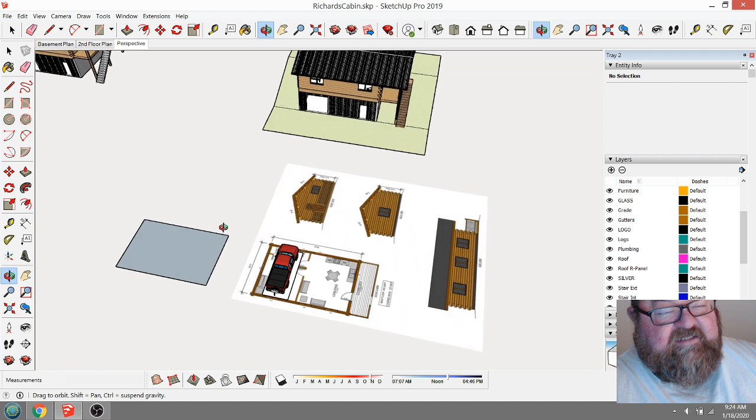But the reason I mention that is because Richard, if you're out there, has talked to several people about this, and I think it's great to get advice from your friends about these kinds of things. But you're doing the right thing, okay? You're talking to a person who's been doing this for 40 years, and I can help you. And I'm going to show you why the little cabin is not for you.

My rule of thumb is that anytime somebody comes to me and they want to build a home, they should never, ever, ever, ever take a plan out of a magazine and call it theirs. First of all, it's kind of tacky. Second, it's just not right. You need to design your home around you and your own requirements.

There are minimums in this business, but those minimums are like code requirements, and people refer to the code as if it's some kind of a Bible. It's not the Bible. The Bible is the Bible. The building code is the building code. It is a minimum. It is not the standard. It's the minimum standard.

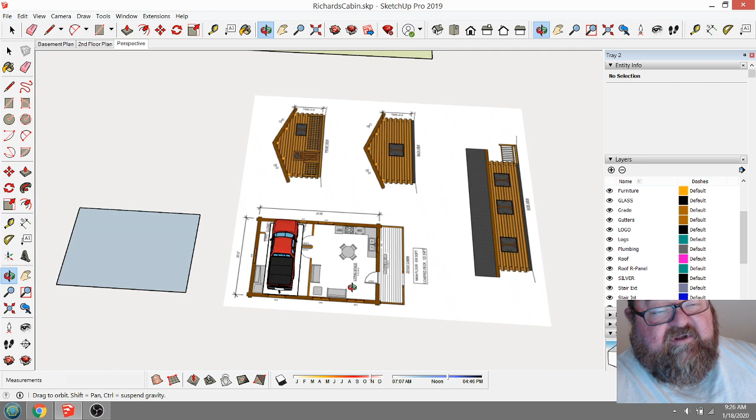But that said, I should digress a bit. The code will set up the minimums that you need for egress, circulation, that kind of thing. So we need to take heed to the code, because if you have to get a building permit, then you have to adhere to the code. But don't use it as your Bible. Have a higher standard than the minimum.

And this plan, this 20 by 30, I wasn't even going to show this, but I guess I have to, because I don't do this. I don't take drawings out of magazines and copy them. We don't do that at Artisan Construction.

We take the person and we sit down and we develop what's called a program. We program, it's like programming a computer, we program your home. We sit down and we ask you what your requirements are, how you live, what do you want. Do you have children? Do you have guests? Do you live by yourself? Do you need a man cave, a place to store beer, all that good stuff.

So to get into this, Richard was telling me that he needs... and I don't want to say, that's why I said I really shouldn't do this live, because a lot of times I'll say things and I go back and cut them out when I edit. But I don't want, Richard, I don't want you to take anything I say offensively. This is just me offering free help to a friend, and that's all it is.

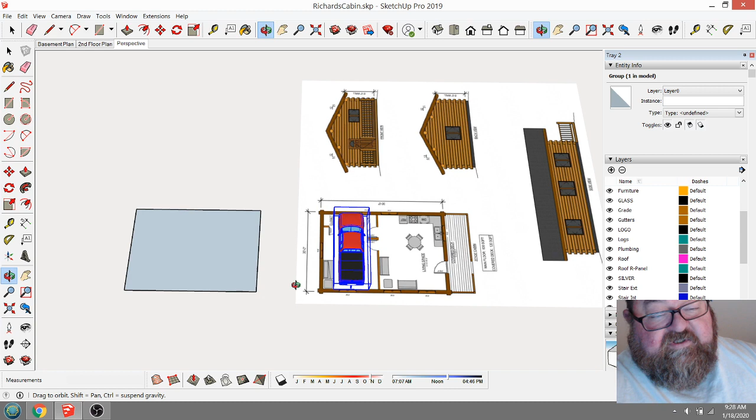So I'm going to start off with... let's see if there's anybody. Nope, that's fine. Again, this is a work session, and I'm just doing this to cheat and let YouTube make the video for me. So anyway, we're going to start off with this little cabin, which is 20 by 30.

It's 600 square feet, and I'm going to show you why this is too small for your life. I mean, if you were a homeless person and you wanted to upgrade to a place to live, this would be it. Okay, and I'm not being mean to homeless people, I'm just saying if you need an emergency shelter, this little cabin would work. But if you want to live somewhere for the rest of your life, have a decent life, do things in your garage and shop, have guests over and a big screen TV somewhere, then that's not it. Anyway, enough of that.

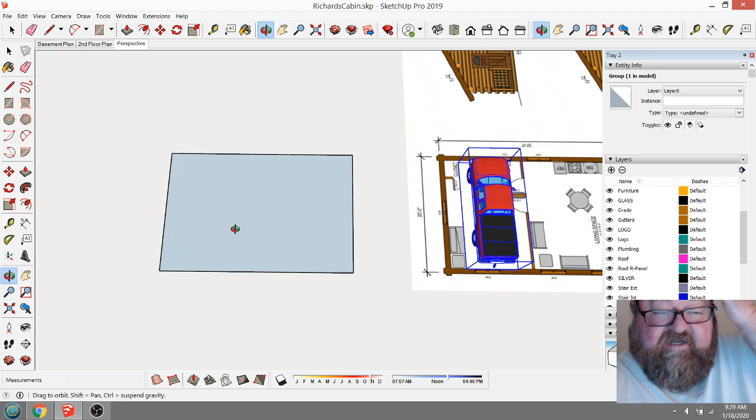Let's move on. We're going to go back to square one. I went through the trouble of laying all this out, designing this cabin based on the minimum requirements. Let's see, the basement plan, then second floor plan. This is basically the same layout, just a better layout. I'll show you in a minute. Let's go back to this perspective mode.

But we're going to start from square one, and I'm going to back up, start all over, and we're going to go into the basement, which is where we have to start. We're going to start out with Richard's requirements, and this is what you should do. He said he wanted a garage to start off with to hold a Tacoma.

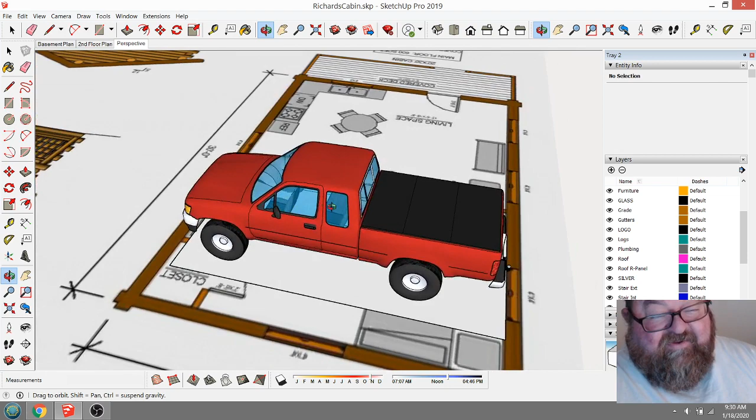This here is a Tacoma. And as you can see, it is as big as your house that you thought you wanted. Now, what we're going to do is this is what I do. I always make a footprint, because these three-dimensional objects are hard to work with. I just create a footprint around it for what it should be, and I'm going to place it in here.

So first of all, when I say start from the beginning, this is a 20 by 30 square. And to have a basement home, you would need a 10-inch poured concrete wall for the retaining part of it. So all of a sudden you've already lost 20 inches. I'll show you this right here, and this is why. These walls, especially this back one—you're not going to save any money trying to make them thinner, you might save a couple hundred dollars, but you're better off letting the guys make all these walls the same thickness, because again, reduce complexity.

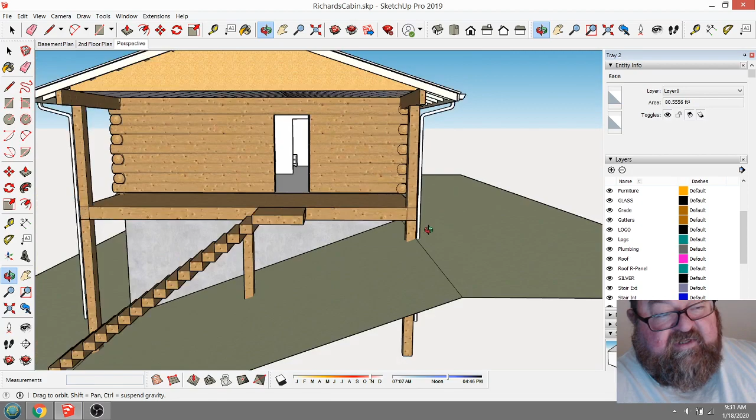So if you want a basement home—now if you just want a two-story home out in the field, that's different, we can build the walls wood frame. But if you're going to have a basement, it's going to have retaining walls. They need to be 10 inches thick, poured concrete. Don't even let somebody in Middle Tennessee tell you that you can do it out of concrete block, they're living in the Stone Age. Now we've established that.

Now let's take our truck and place it in here. Where's my move button? There it is. It's the wrong move. Okay, now I think you can see where I'm going with this already. So if the house is 20 feet wide, and you have a Tacoma, you won't even be able to walk around it, okay?

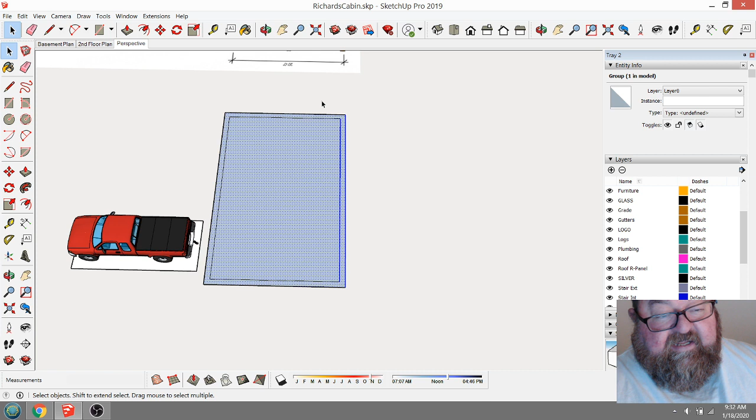So let's start off with the first requirement: 24 feet is the minimum width to have a garage. So we're going to add 4 feet to this. Did I make that a group? Four feet. Now we can start to park a car in the garage. I'm going to push this right over here, and then we're going to talk about space around the garage, around each side of it.

So now you can pull in the garage, and first of all, you probably will have enough room to put toolboxes at the end, like your stand-up toolboxes. You have enough room to do shelving down here, okay? But 24 feet is our minimum depth for a garage.

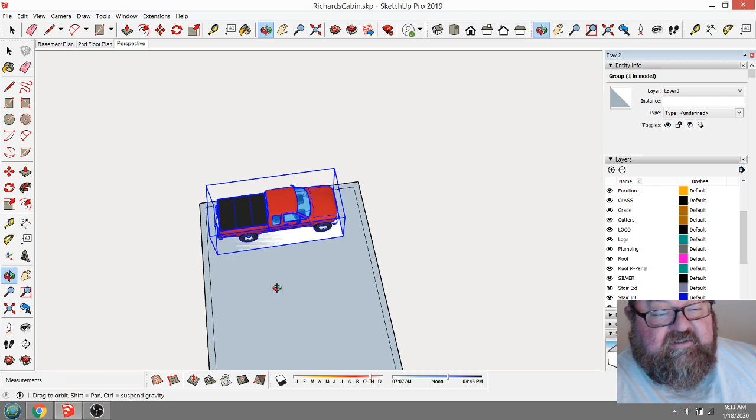Now how did we establish these minimums? Well, 10,000 years of architecture, okay? Yes, the Egyptians had Tacomas, okay? So they had cars, they had buses. It's just all hidden technology, okay? And I know I'm being silly, but it's Saturday morning and I'm a little giddy. I had my Starbucks coffee.

Let's see, so really on the width here, the standard is 2'6". So we're going to move this point over 2'6", and the same on this side.

Again, we allow 8 feet for the vehicle itself, and then 2'6". That gives you 13 feet. 14 feet is preferred, but we will give you, let's see.

Now part of what we're dealing with here is the garage door. You're going to need at least a 9-foot door on the width. That's the standard garage door.

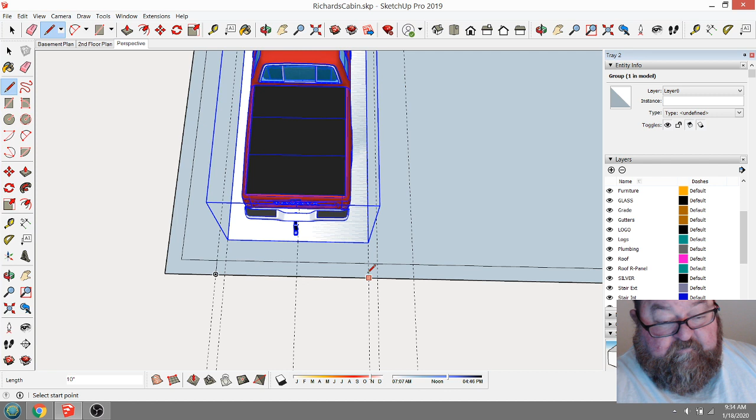So if we go 4'6" that way, and 4'6" this way. We're going to chop out our little door here, and we'll take out this line to represent that. That's our door.

So we're doing pretty good. Now, these walls, this wall can be a 2x4 wall. It's preferred to be a 2x6 wall, but to save room, let's see, I need to do my offset.

Let's see, did I move it? 13 feet now. 4.5 is the width of your wall. Okay, so we're going to draw us a pretty little wall down here.

Now, the next thing he wanted was a guest room. Now this is where the controversy starts. I think I can pretty much talk you into this, but let's see.

One thing we need to do is go get our stair. Let's turn off the roof, and so we can see our stair.

And we're going to copy it. Copy that. Let's see, what happened to my U-shaped stair?

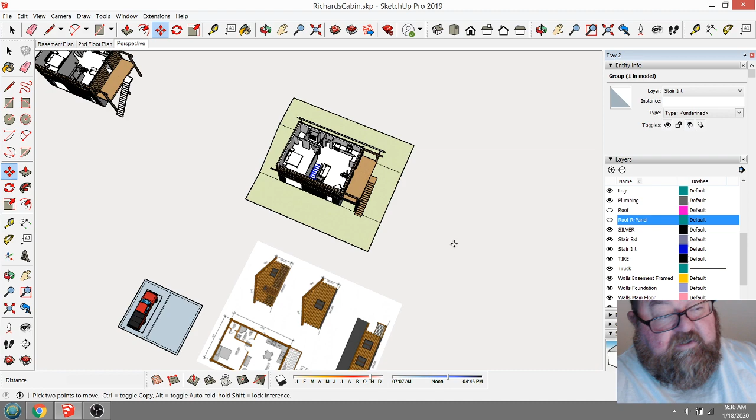Okay, he wanted a U-shaped stair. I thought I was thinking that was the most current house, but I guess it's this one over here. Okay, so we're going to copy this over here.

Now you can start to see already another problem we've got, and that is how much space stairs take up. Why won't that go down to the ground? There we go.

And here's where you get into problems with minimums, okay? So let's see, what have I got there? 3 feet 4. 3 feet 4 is about, really, you can go probably 3 feet 2, but you're only going to save a couple of inches out of here.

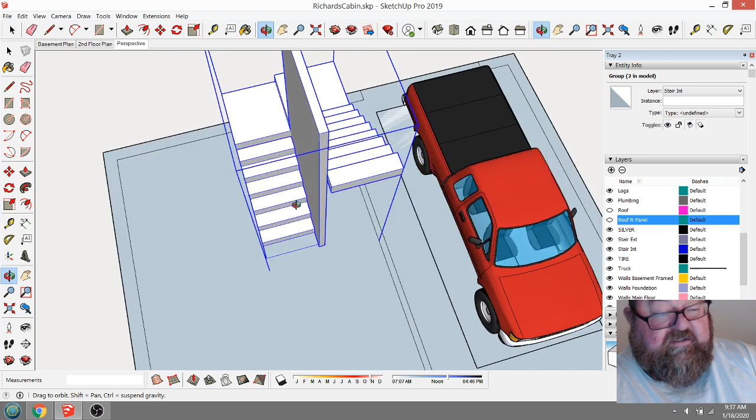Let's see what we've got. Well, I'm not considering this wall yet because I'm saying it has to be moved. So we're going to look at this and see what space we have left.

I was able to do away with one stair there. So we only have 13 feet 8 left. Now that will actually work.

The other thing you need is a door right here, or 4.5, again standard. We always leave a jack and a king stud and another stud, and then another stud. And so right here would be a door.

And then we can delete these construction lines. We can delete these lines. Okay, and then there would be a wall.

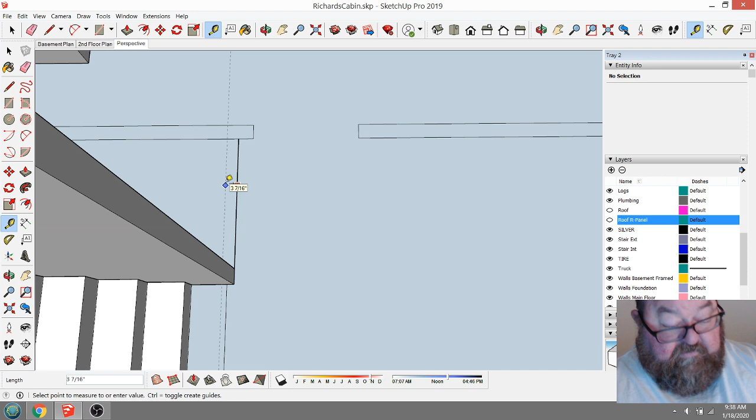There would be a wall here that what you would do is you would close off that would allow you to close off under the stair. Have a door there for storage and stuff, or you could leave it open, whichever. I'm just showing you that's why the little nub is there to bring it out past the.

So, any comments yet? Nope. Good.

Okay, so 13 feet 8 is enough this way. You need at least 12 feet this direction. Okay.

Now, we're out of room basically already. So what Richard wanted, and I'm going to move this over.

What Richard wanted was another space. So let's just say we got another 4.5 inch wall.

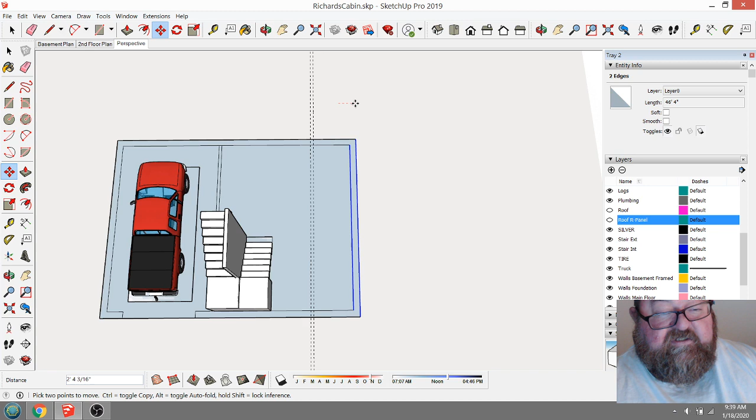I've got too many thoughts running through my head at once, so you'll have to excuse me. And this is why I don't normally do this kind of stuff live. I'm just going to move this out here a random length so far.

Okay, not sure what happened there. Do I have anybody watching? Oh, okay, good. I'm trying to keep up with the comments if there are any.

So let's see, did I do away with my wall? I didn't draw a wall, did I?

All right, what this is going to do, and I don't think there's enough, well, I think I've got this worked out in my head, okay? I'm doing this on the fly, so excuse me.

So then this would give enough room for a door here. We would have, let's see, we'd have a wall here, 4.5. And then whatever the center of that would be from here to here. So that'd be 2 foot 3.5.

2 foot 3.5. Okay. And then you'd need at least a 32 inch door there. So we're just going to show a 32 inch opening.

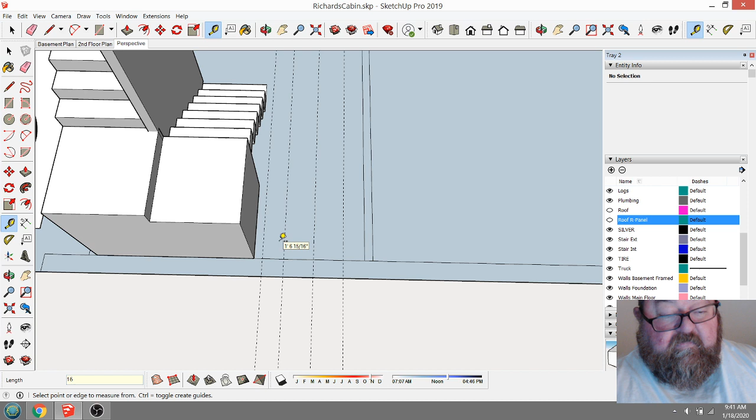He wanted a way for the guest to be able to come in and go in and out. Now, this is tight, but you can get by with this. I'm not going to sit here and say that you couldn't get by with the guest room.

Let's go get a queen size bed. You have to have a queen size bed, especially if you're from the UK. Let's just grab the first queen size bed we see. That looks weird, but we'll check it out.

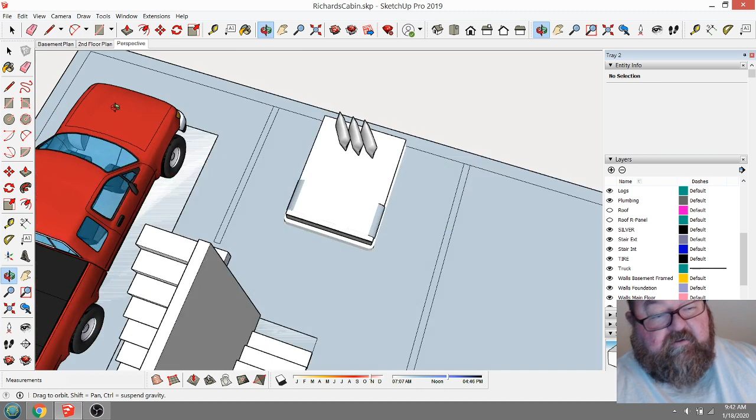Let's turn her around, I think that's the way it's supposed to go. So you could do something like that, and then I'll show you what else you can do. Let's move it over a little bit so you'd have room for a chest of drawers and whatever else. That'd be kind of a cool little guest room. There's the closet for the guest room under the stair.

That's cool. And now the next controversy is the shop. Probably the most controversial space, especially with the onslaught of the internet. I remember the first time I started doing research on small shop layout on the internet, it was like a gazillion different opinions.

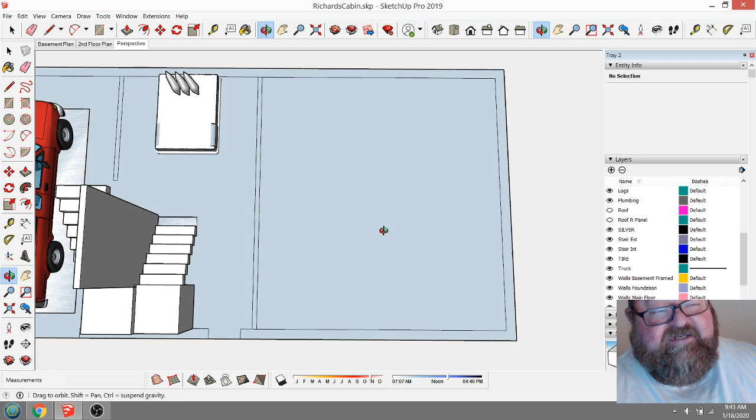My standard is if you can't take a 16-foot 2x4 in your shop and spin it around, then it's not a shop. And I had a shop layout— dadgummit, I forgot to get that. But the point is, let's just see.

You know what's funny, I've never actually done this. Let's see, small shop, let's see what SketchUp has. Small shop—oh, I should have said small wood shop. Small wood shop.

You see, there will be a gazillion different opinions, and what I should do is just show you what I have learned over my 40 years of experience. Let's just take the miter saw. The miter saw and the table saw are the standard.

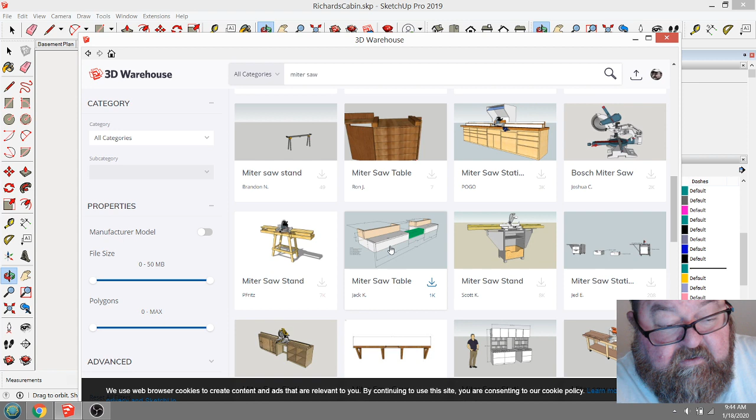Let's see if somebody has a stand we can put in here. I'm sorry, I should have done this. Here's kind of a cool little setup—here's kind of like our setup. And ours has to be portable. Remember, we need portability.

You want to run it this way, because you want to be able to run this. You want to be able to have some kind of shop door here, and you want to be able to run a 16-foot piece of material, which you will have. And this needs to go right in the middle.

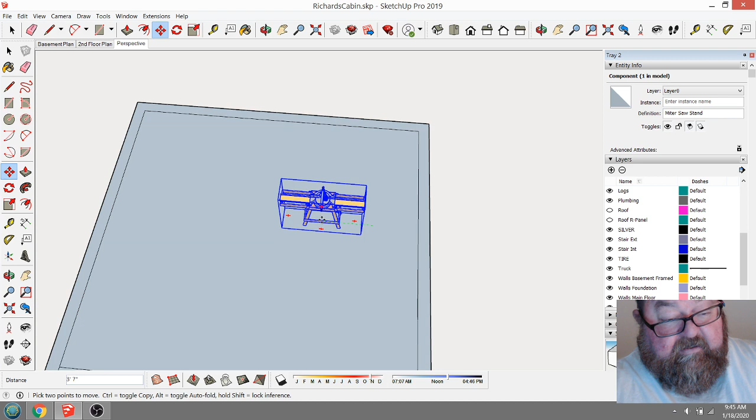So we're going to try to find the middle of this thing right there, and we're going to slide it down to the middle. I know I don't need this much space, so I'm not going to start out over there. Let's just see for the fun of it what 16 feet would be, what that would make our overall length, and I think we're probably going to be able to get by with a little less than that.

42. Okay, I know he's probably not going to go for that. Let's see, so let's just do this.

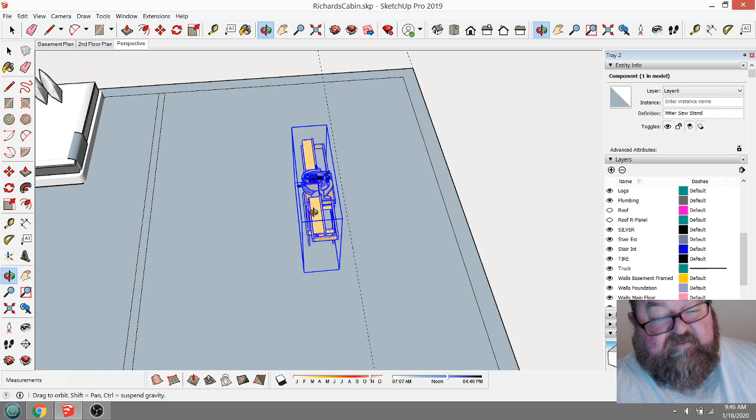Let's put a hypothetical wall at 10 feet, and then we'll move the miter saw over to there. The problem with miter saws is they're never shown with enough room behind them, because if you have compound sliding miter saws, the daggum thing is like 2 foot deep. So you have to allow—of course that would be a standard countertop—you've gotta allow 24 inches, and I think it's actually deeper than that.

We have a 12-inch compound miter saw that really takes up a lot of space this way. I wish I had the actual one—this is not a compound miter, but it's similar to what we have. But we have enough room to where we can take a 16-foot 2x4, take it in here and cut it. And this 24 feet depth is perfect for a shop length. Because you want your garage over here, this forces you to have the proper length on a shop.

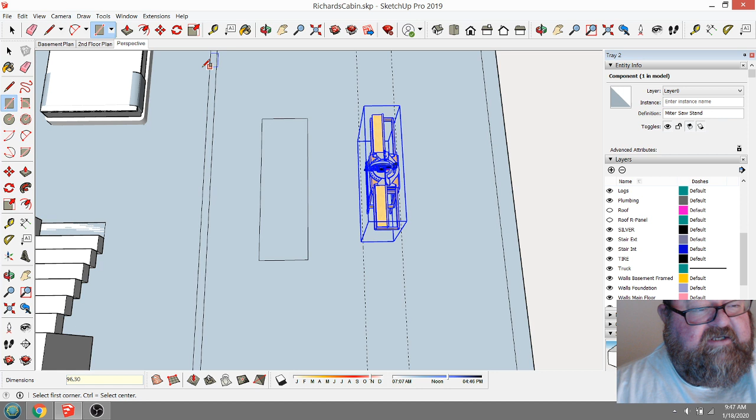What we're trying to do now is establish what I think is the minimum space. But what I'm going to suggest next is that you need at least a 30—what is that? It's 96 by 30. A 96 inch by 30, actually 36, sorry.

That, to me, is your cue to make a group out of this. So the only argument you can make is, really, I'd say you need about 2'6" here. Okay, so we're going to move that over there. And then you really need at least 3 feet here.

Yeah, that's 2'6". And the thing this allows you to do is, let's just take this table up. And we're going to bring it up to 30 inches. I like 30 inches, and I'll show you why.

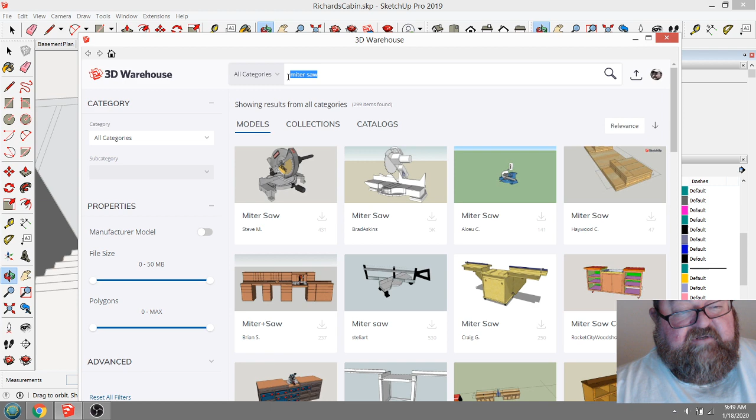I don't like these big, tall shop tables, because the way we have ours—and you can find it in our recent videos—is we have the table saw. Again, everything we have is portable. You have to understand that everything we have, we need to be able to take out to the job if we want to. So I'm going to look up and see if they actually have the new Skil table saw.

Table saw. I'm just going to say table saw, and we'll probably just have to grab a generic one. I don't want to spend a lot of time looking for tools. And this gets worse if you have a normal big shop. We had, in our last shop, a big old Powermatic you had to bring in on a forklift. That's just ridiculous. I'm just going to grab this one. I don't know how big it is.

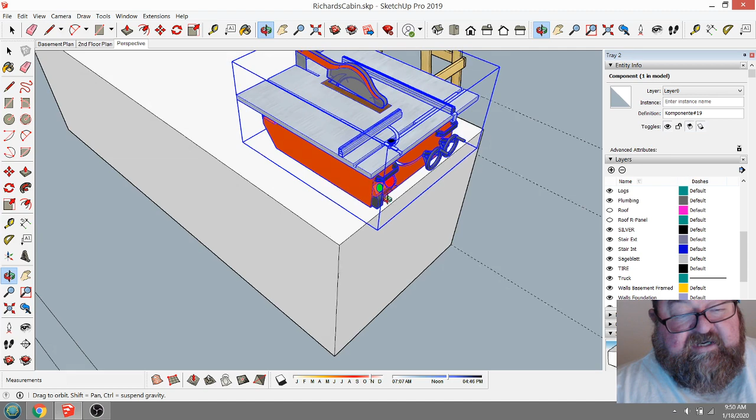That's about right. And what we do is we put it on the end of the table like this, okay? And so that gives you enough room. It's right on the edge, okay? And it's bolted down to that table—well, it's just got a couple of screws so you can move it easily. Okay, but that gives you enough room to saw and lay things here, like a rollout table.

We have a short little setup where we can roll out things, okay—a little rollout table up here. But then this allows you to build stuff too. So at a minimum, this table is on casters, so you can roll it around.

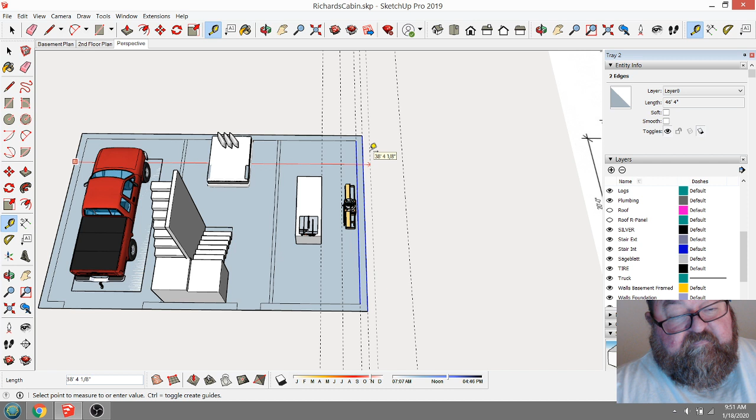Okay, so now that, to me—let's see, did I get my 3 feet over here? No, still 2'6". Let's just see what that would make it. 37.5. So in real-life terms, you could make it 37.6. I'm a big believer in keeping things simple. Make it 37.6.

But now what you can do—the thing about it is, he wants a restroom down here. So my original thought was to take out like this, I'll make a group out of this. This would be back here. Now, I don't know if he wanted a door. We're just going to show a door. What is that, 5 feet?

Let's get rid of some of these other construction lines. And for now, let's just show—I mean, you're going to want at least a 6-foot door, which you could easily make out of 2 pieces of plywood, or you could build a 6-foot door, two-leafed, because you want to be able to.

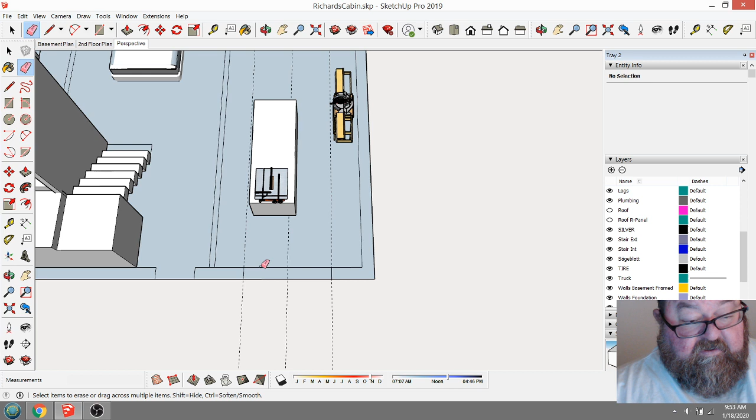We had, on my last house where I had the shop in the basement—the Arden Avenue project, you can find it on our website—we had an 8-foot door, and it was 2 leaves. They both opened out, and you could wheel stuff in and out.

But that, to me, is the bathroom. You could probably—but keep in mind, the other thing you run into on these concrete walls is, unless you're going to make these—unless you're going to leave them concrete, you're going to need at least 2 inches where you put like a furring strip.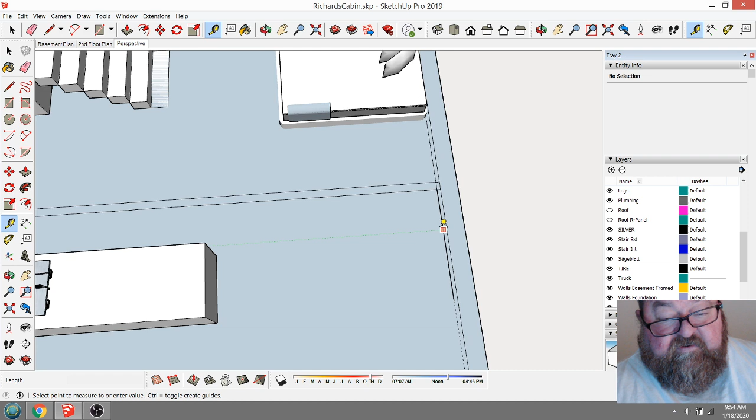I'm just going to bring this line down through here, 4 ways. You're going to need to allow—that takes out more space, so it just kind of keeps closing in on you a little bit. But let's see, a small bathroom layout would really be, I'd say, 5 feet by, let's see, 3 and 3. You're going to need at least—so this is going to get into—

You need at least 30 inches. You need at least 30 for a sink or a toilet, and then you need another 36 for—see, it just starts to get... I'm trying to think.

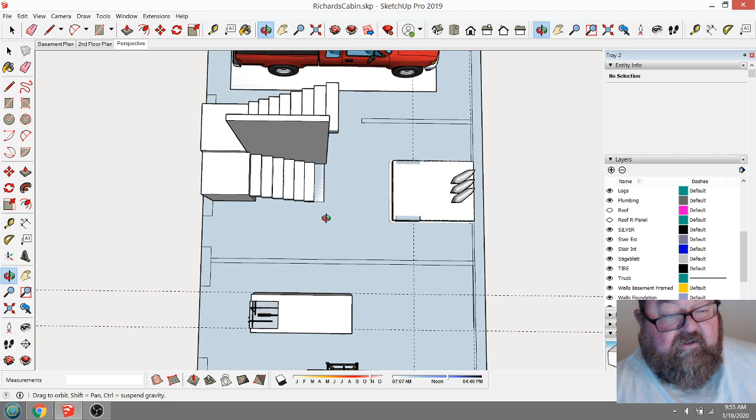I think there's a way to work out a bathroom. Maybe you could possibly do this and let some of it come into the room, but that wouldn't make much sense, I don't think.

I mean, if you did like a shower, it could come 6 feet this way, and then come, let's see, that would give you a 3 foot by 3 foot, and then a toilet. So you'd still need 3 feet and 30 inches.

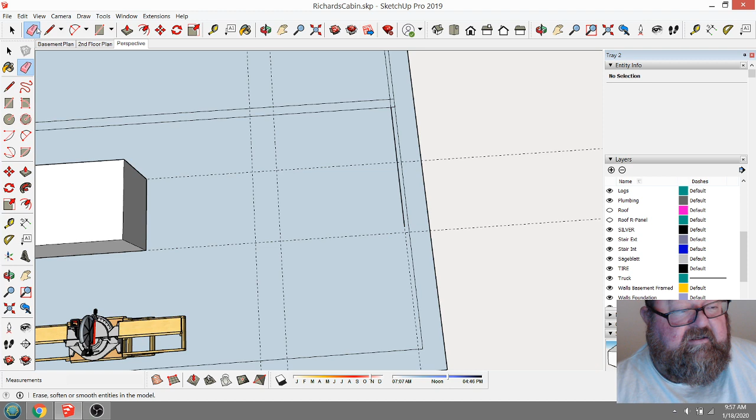You'd probably get by with that. So I'm not going to spend a lot of time on this until I see if Richard's even anywhere near on board with it, because he's the boss.

The only thing is, you need at least 2 feet here for a side table and just a walk around the bed. And you need the same on this side too.

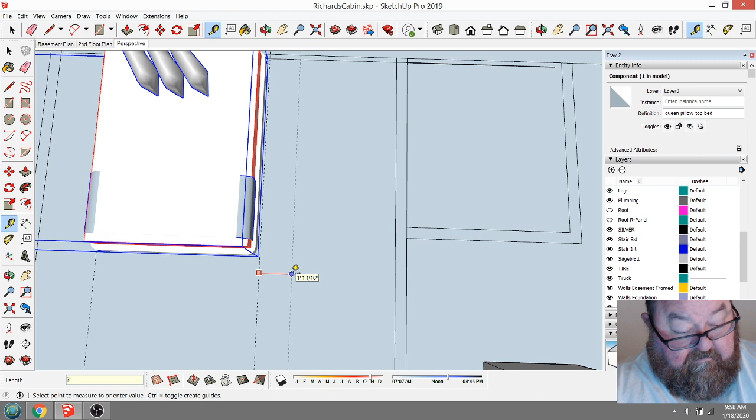Trying to see if there's a way to slide this bathroom over enough to get a door. You don't really save any room turning it that way.

Really the only difference is, and let me show you, I'll just show you right quick. 36-inch shower stall.

Let's see here. Let's see if this is 36. We can make it. This looks like a 4-footer, but we can squeeze her down to, no, I can't squeeze this one down that much.

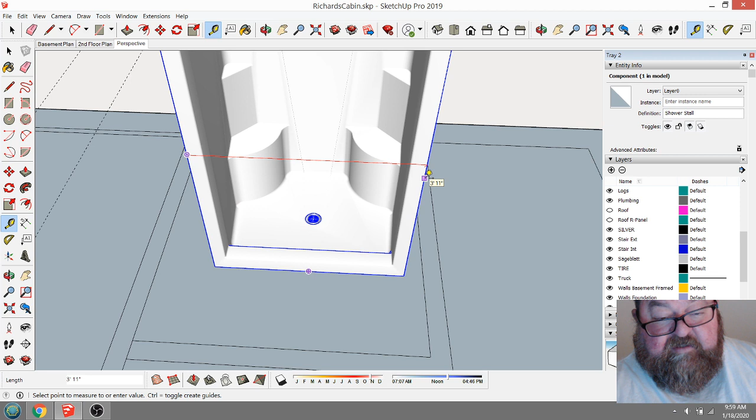Alright, let me get another one. That had too much detail in it. Let me just type 36 up here. And there we go. That's what I should have done to begin with.

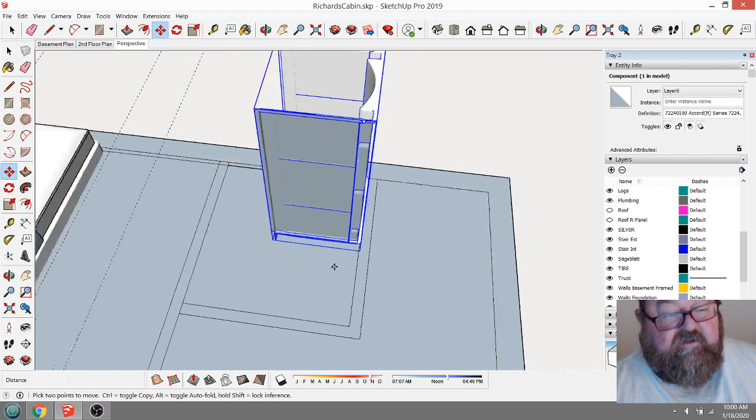You can see, I mean, stuff just needs room, you know, just needs space. Let's see, what do we do? Really, how big is that?

This whole thing would have to go back a couple of inches. And then what you could do is put, you could slide this over. And put your toilet.

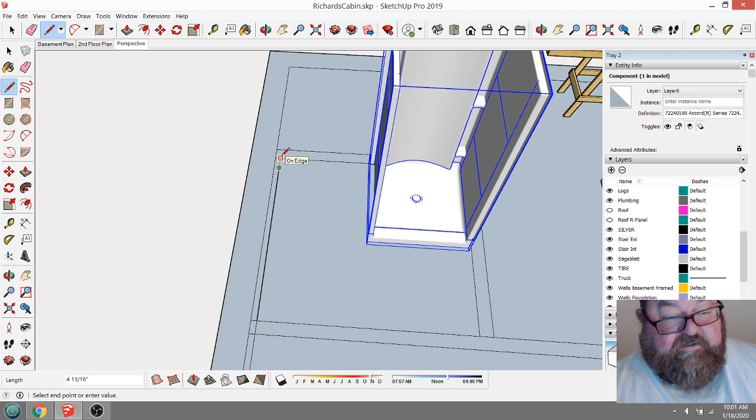Trying to show the framing on the wall there so I don't forget it. Let's see, I got a toilet up here I can steal. And a little corner sink. You don't have to do the corner sinks, but they do save you some space.

Where are we? But you can see already what we're up against. Trying to get that to go down.

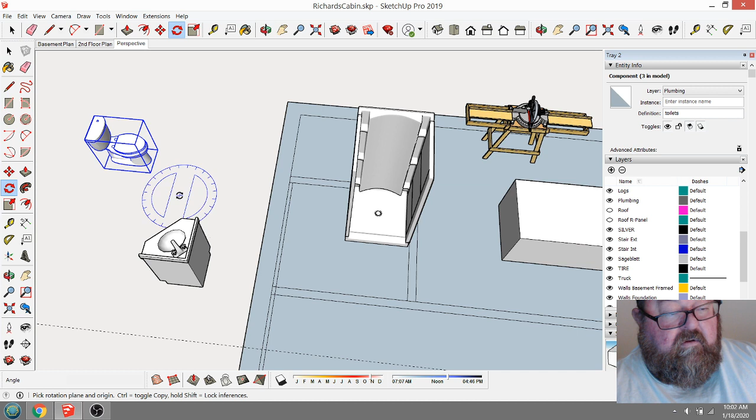And you'd have a little wall beside the shower, beside the shower stall. This would be over against the wall like that. And then, still kind of tiny though, because you can see

You really need, that would be, you don't have enough room for the door to really open. You need at least 30 inches here for the door. Well, you got 32, but you need, I'm trying to think of a better way to lay this out.

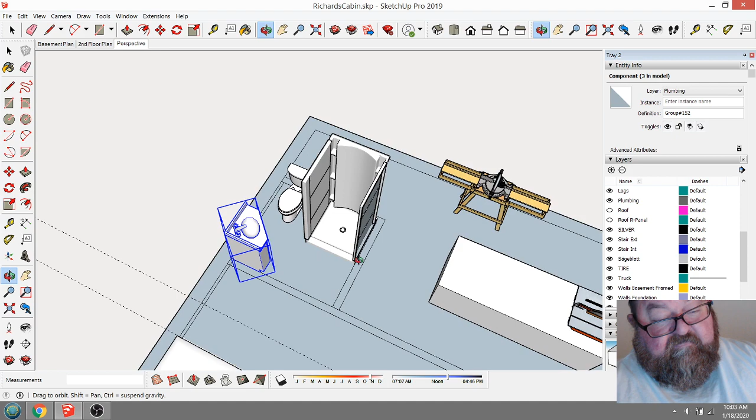You could use like a corner shower. Let's go back to the shower stalls. They might have a corner. Is that all the ones they have? Yeah, here's one of these small corner ones.

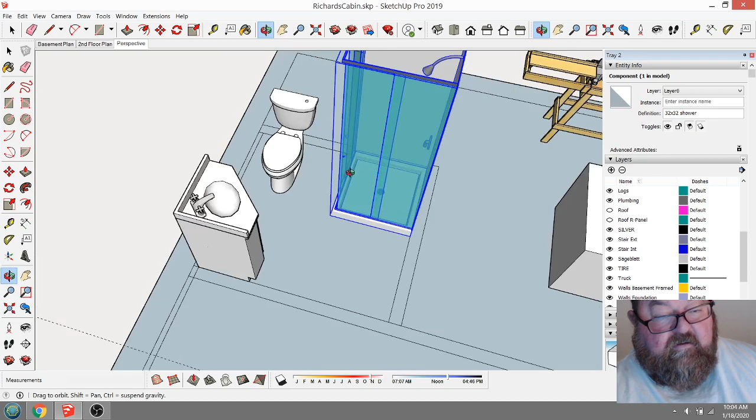Where I can see. Then you could probably cheat that. It's really tight.

But the problem is then you've got this weird situation here. But all this could be moved down, this way a little bit.

Or you could actually take a notch. You could notch this. Let's just cut this off for a second. I don't like doing this kind of stuff, but you could move. You could take a notch out of this bedroom.

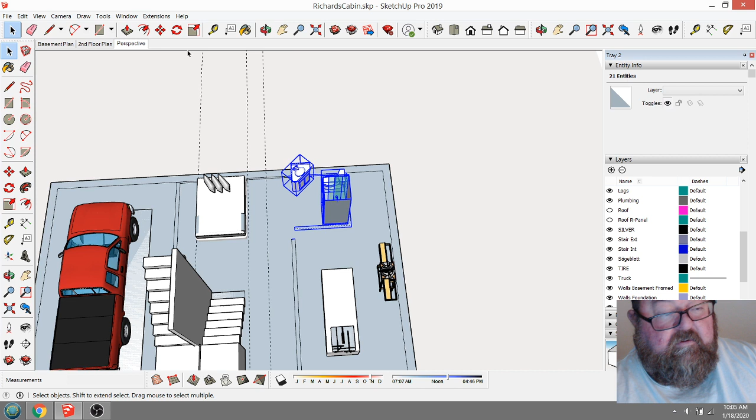What is that? 2 feet. Like that one would be cool if you could get enough room to get the door on this side, but that's not gonna work.

I don't think you'd have enough room to, if you turn the bed this way, what have we got?

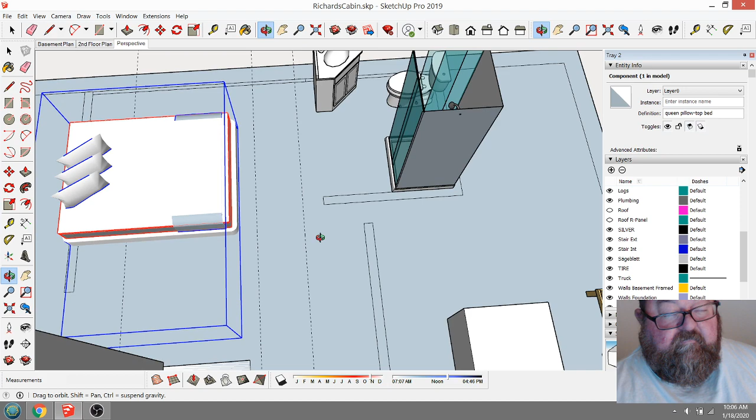You'd have to make the bathroom a little bigger. You would have to have, I'm going to say, I don't know where they get these 32-inch showers, but I'm going to say you're going to have 36 here. And then you'd have to have, you might be able to get by with 3 inches of framing, and then your 30-inch door, and then I'm going to say 4.5.

Let me delete this line right here, and then what did I do? Is that 36? Yeah, and then this would be your wall. Again, this is tiny stuff. This is minimums.

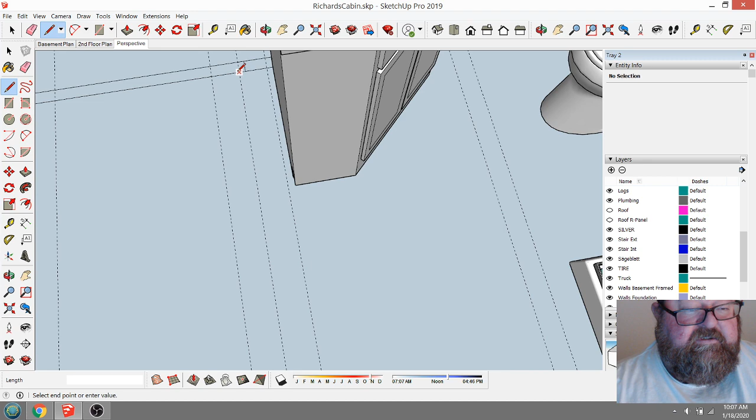What did I do? Now the bad part is, let's just say if you got 2 feet, what we got here? We've only got 2'9" there already, so I don't think there's enough room. You would have to, let me get rid of some of this stuff over here.

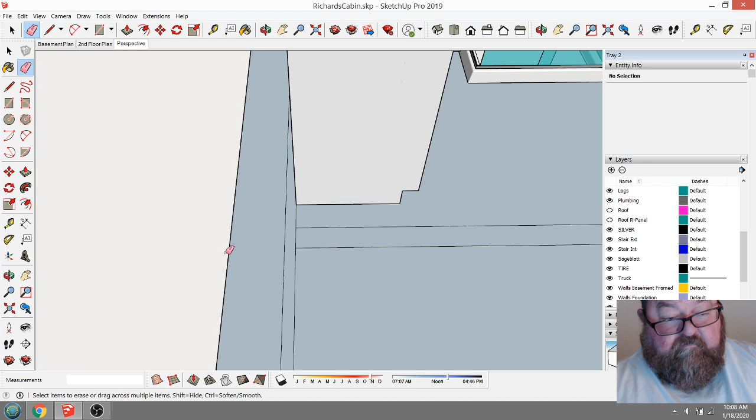This will all have to be slid to where it was, I'll grab the wrong thing again. To where this was, at least there plus 3 inches. So you see that doesn't really give you much room at all.

Yeah, see, it's only 8'6". That needs to be at least 9 feet.

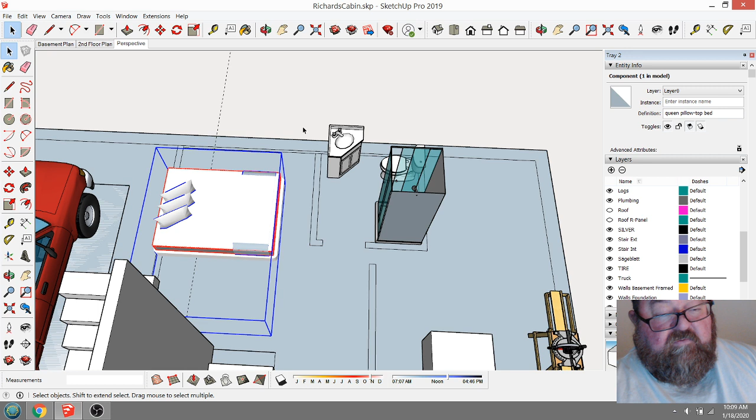But let's say we had our 9 feet there. Let's work into it this way. Let's say we had our 6 inches, and then we had, let's see, it would just be this.

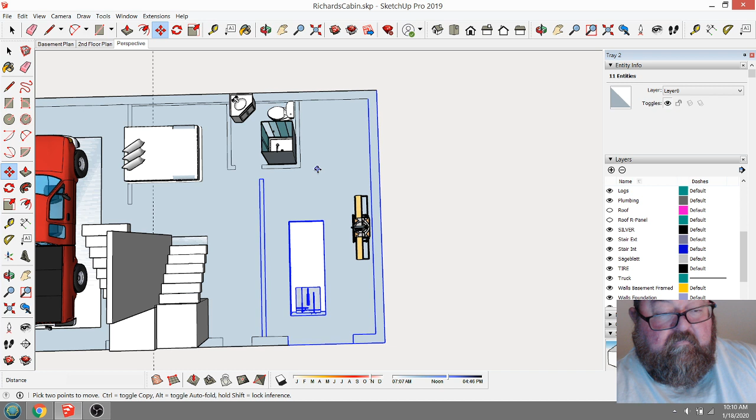That just means we need to add 6 inches to this whole thing, which is not a big deal. I think that's the answer.

Yeah, again, this small stuff here. Okay, you might be able to get by with a twin bed. Let's see if we can turn this back. Probably still going to work out better if we put this like that. And then this becomes usable space back here again. You can almost move this back.

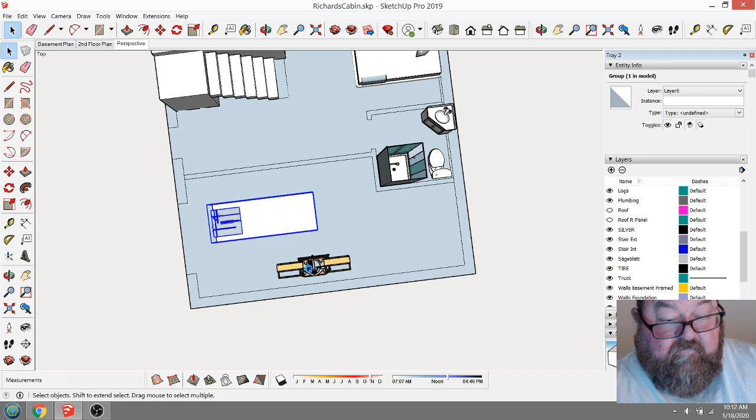To the center. And I'm losing my computer. Oops, didn't mean to. Yeah.

And then this would go back here, like that. Let's look at it from above.

36 feet, 38 feet. Okay, so what's the math? 24 by 38 by new construction standards is still small. 24 times 38, 912 square feet. That's smaller than a Habitat house.

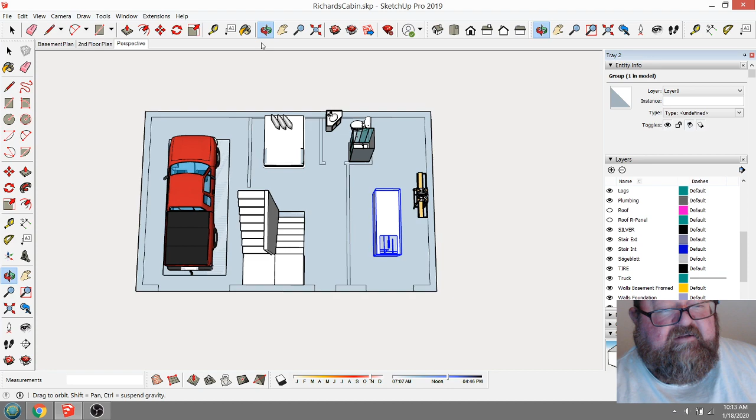Okay, so maybe skipping a Bahamas trip would build you this basement with your cabin on top.

I like this floor plan, and of course I've modified it to allow access from the bedroom. I don't like this not having access into the bathroom from the bedroom, and the closet was too small. So if you look at our idea, our plan is to have access into it from the main bedroom, and you have a decent walk-in closet.

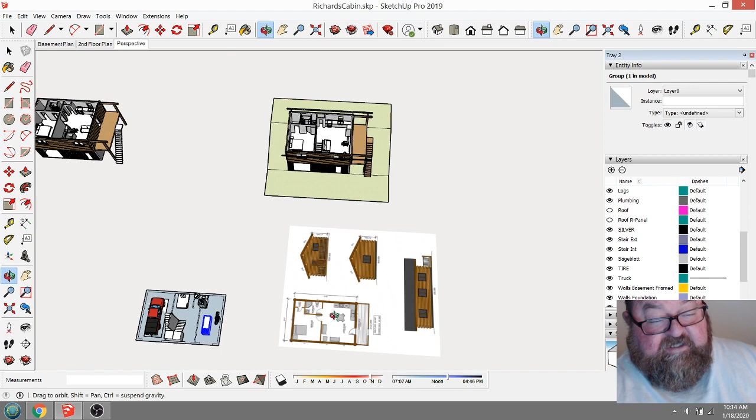Again, these little tiny cabins, storage is the key. Okay, if you gotta have a place to store stuff, it's like in this kitchen. You need a pantry, man. You can't, this kitchen here, no place. You can't store crap in these cabinets. There's no room. There's no room under a sink to store anything except your Brillo pads. There's the dishwasher. There's the range. There's the refrigerator. There's no storage, okay?

And you can't get enough cabinets in the kitchen to do anything with, so you gotta have a little pantry to store food and supplies in. And at least this layout has more cabinet space, because here I don't have all the cabinets laid out, but your dishwasher could go on either side, and then you could have stackable drawers. You could have 4 drawers, a drawer stack or whatever here, and then you'd have your wall cabinets.

And one of the cool things that Richard is looking at is the wood stove that also heats hot water. I think that's cool.

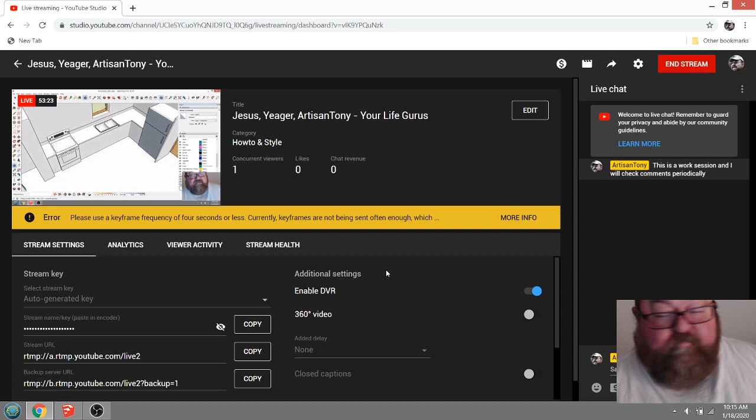No questions? Probably too early on Saturday morning for questions. So I think what I'm going to do is let Richard look at this and then give me some feedback. Let's pull these walls up. Let's do that, so we know, because it's kind of hard to really get a sense for it. And this is what I would normally do.

I would do my floor plan first. So that's going to be 10 feet. And all these walls have got the faces—I don't know what is going on with these faces. They're all reversed. There we go.

And then this wall would come up to there. This wall, like that. And that kind of gives you a sense for how things would be closed in when you do this.

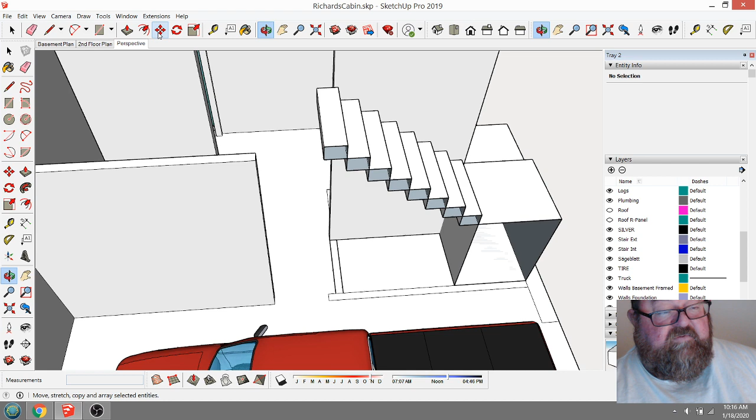Oops, that's not right. What happened there? Oh, I need to close off this wall and then open this up. And then this would come all the way up to here, like that. Now this wall would be underneath, would stay underneath the stair.

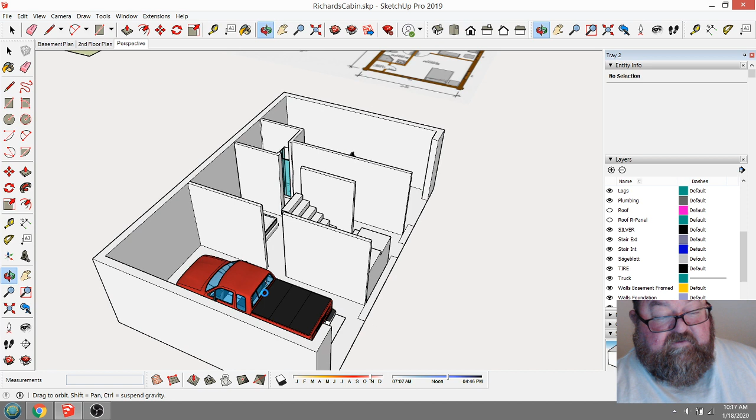And there would be a door in there for the closet, for the bedroom. And then you need—I know you said you didn't need a door from the garage.

Let me get my computer back. It's freezing up. Need a new computer, Patreon.

But I know you said you didn't want a door going in from the garage, but you really do, because right here are your stairs going up. Come in the door, run up the stairs, and you're in your nice, cozy, warm log home. You don't want to have to walk outside and then go up the steps just to get in your own house. Once you drive in, you're in your castle, man. You should be able to go into your castle from your garage. So I think this is probably the most efficient basement plan I've ever done, to be honest with you. And it's quite a challenge, really.

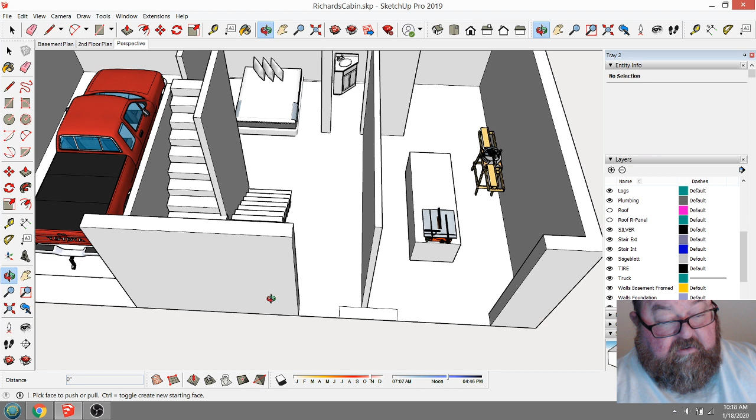And I forgot to bring up these walls, didn't we? Now obviously we could save some room. These walls can actually be framed up, so they can be thinner walls down here. We normally would frame this entire wall like this, and then put some kind of metal siding. The lines on the siding are crazy, too many lines - that's one thing about SketchUp. But we normally wouldn't pour this wall because it's daylighted and there's no reason for it to be poured. It just saves money not to pour it unless you just want it poured.

Yeah, let's pull these up. Starting to rain hard here. It's the other reason I got on the computer this morning - I knew it was going to be raining.

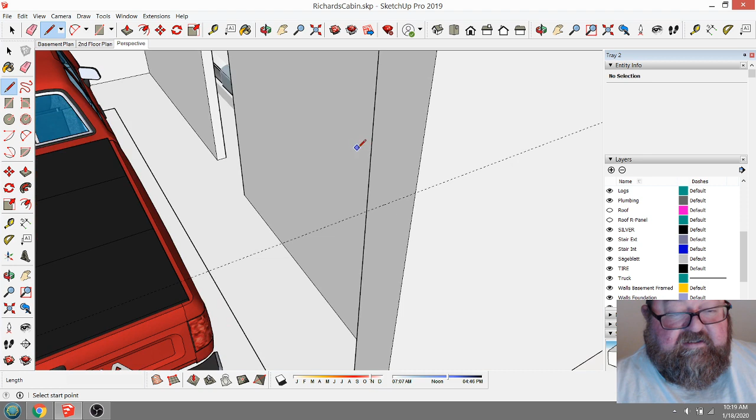And then what I would do here is go back and put my openings at 8 feet. I like my 8-foot garage door height. Don't ever waste your money on a 7-foot garage door - the height of it is a big waste of money.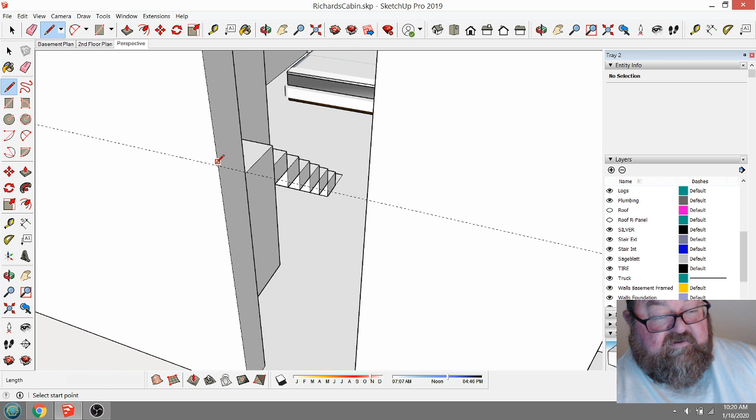We had this doctor we built a lake house for, and he argued with me - discussed it vehemently - about the height. He wanted a 7-foot garage door. I could actually find you these pictures of this lake house really quick. I finally gave in and said okay, I swear to Jesus, this would be 6'8". The first thing his wife did when they were moving in, she had one of those turtle storage things on top of their Grand Wagoneer, and she knocked the garage door off the tracks and tore up the top of her car. If they had just listened to their construction guru, she could have just driven right into her garage.

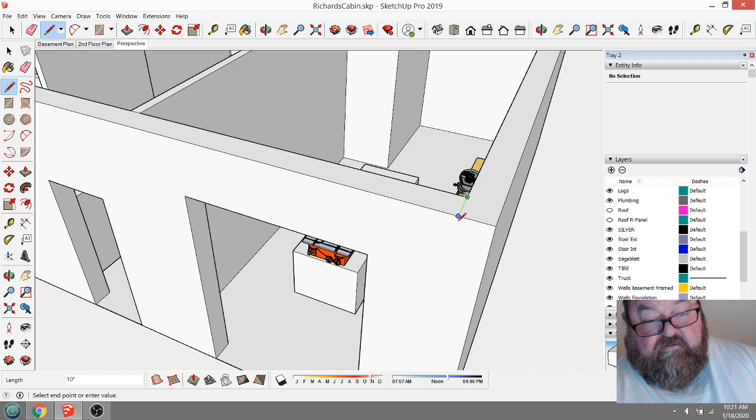Okay, so now I would go back and probably do this door 8 foot too, 8 foot also - not 8 foot two, but... and again these walls, it would actually look like this. The concrete would extend out like that. And these walls would be 4 inches - they would only be 6.5.

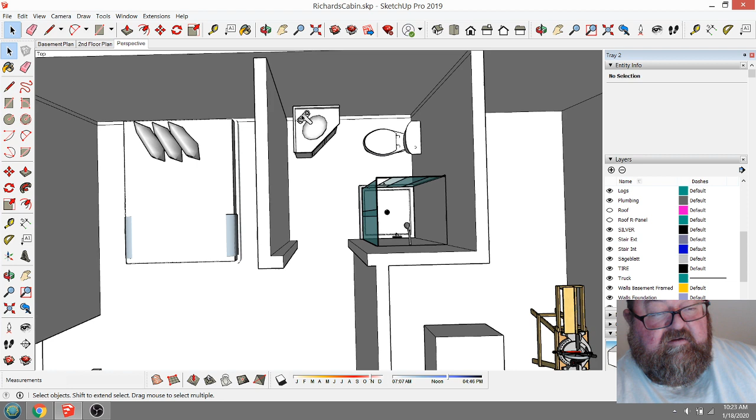There we go. Well, I forgot about that line - I didn't delete that line, did I? So you do gain a little space on the front like that. But see, something like this. Oh look, we forgot to move our vanity over - it's actually a doable bathroom now. You can actually walk around in there.

I'm not so sure if I've actually seen these 32-inch shower stalls recently, but they probably still make them. We usually would use like a 36 at minimum, but again, you could probably cheat a 36-inch corner shower in there.

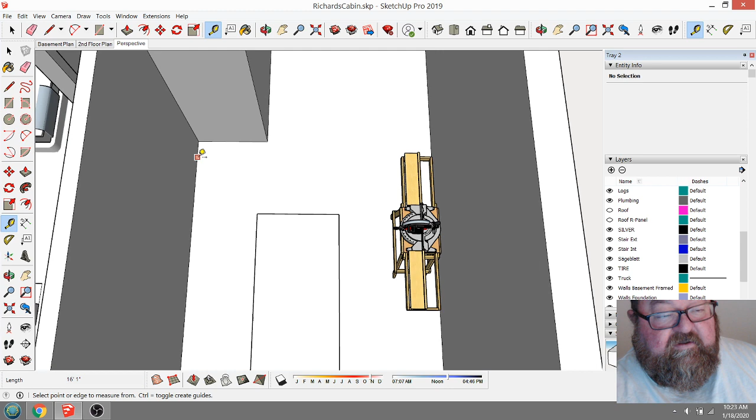And this is probably - what did we end up with here? 10 feet, yeah, that was kind of my minimum. And then 10 by 16 - did we end up with 16 feet here? I don't think so, or did we? Yeah, we did. What about that - isn't that cool? 16 feet 1.

Awesome, because what you could do back here is use this for material storage, or put drill presses or whatever, back shelving, whatever back in there. You'd want to leave a little space off the wall here so that when you're cutting your long materials, they can butt all the way to the wall. Then all your other shop tools can just fill in around the edges. What we do is have small drill presses, small planers, small jointers - everything's kind of tabletop, and I have all these tables with casters on them that we roll around.

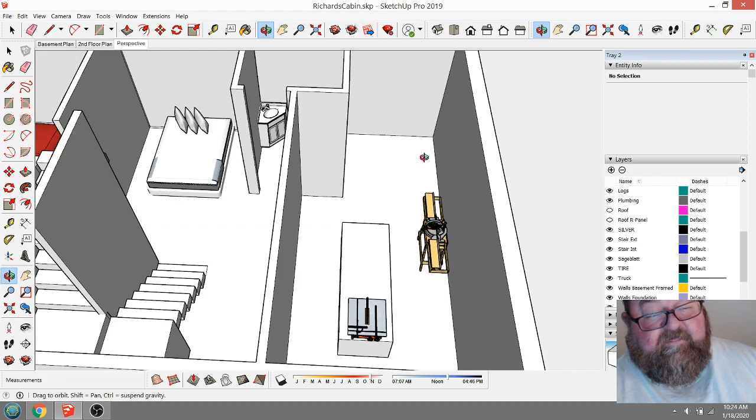The more I think about it, I'd probably try to make this door maybe a little smaller if you weren't going to be making cabinetry - sometimes we make cabinetry and stuff and it's nice to have a big door. I'd probably want at least 2 feet - yeah, you got 2 feet, barely. Maybe you make this door 2 feet 1, maybe make this door a 7-foot door - I meant 5-foot door. But you'd want at least 2 feet on either side of this door to have shelving.

What we have on one end of our shop is one of the stand-up toolboxes, like automotive toolboxes, and they'll fit in that space like that. But you could put it over here. So again, you want to reserve this length here for bringing in long material and laying it on the miter saw. But that is doable.

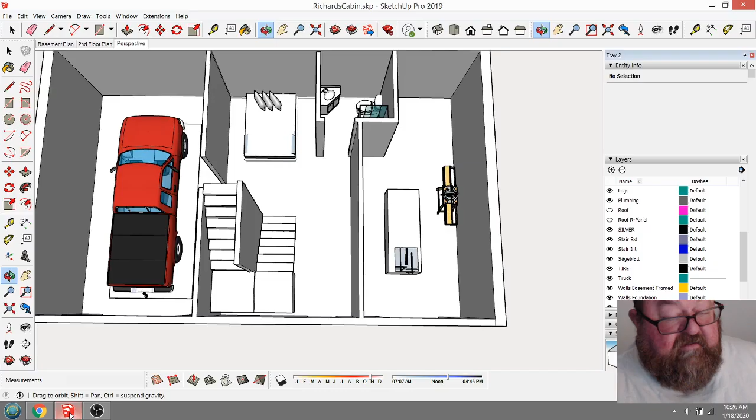We ended up with 38 feet. What did we have up here? 32. We only added 6 feet.

See, the thing is, Richard was wanting me to look at extending the basement under the porch, which is really, honestly, overcomplicated. You would have to build a roof, a ceiling and a roof over the bottom, and then build the deck over the top of that. It's convoluted, and I don't recommend it at all. You're better off doing this.

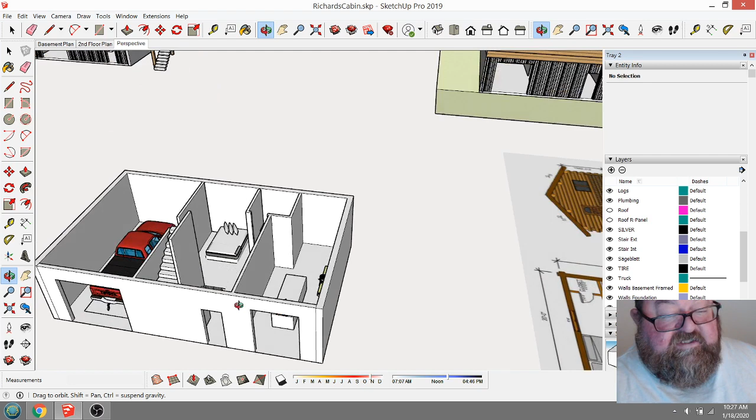Put the whole house over the basement, because the other thing you run into is as water blows in on your porch and runs down that roof, you get leaves and crap under there. The stains from those leaves, there's lots of tannins in leaves, they'll run down your concrete wall and stain it. It's just nasty. And then you say, oh, I'll put a gutter around it. You see, it just gets complicated.

Your stairs get complicated when you start trying to run gutters around here. You just got to keep it simple, guys. Don't complicate your life. Just listen to your construction guru.

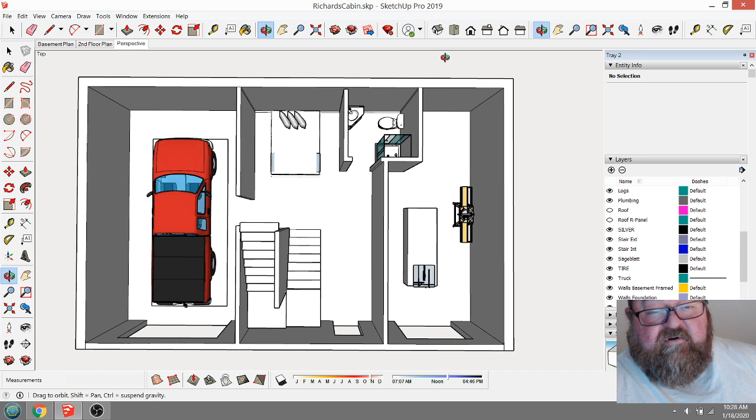But I actually kind of like this plan. Let's see if I can get a view that you could take a screenshot of for Richard. I'll show you what we would do when we start to do our drawings is set up these views.

I'm going to call this one new basement plan. There's my scenes, new scene. New basement plan. Then I'm going to set it up to where it is just parallel projection. That means we don't see any perspective.

I'm going to go ahead and get rid of this, I don't need this anymore. Make the truck look bigger. Oh, and the other thing I need to do is, let's go back to that for a second and we'll save that, update it.

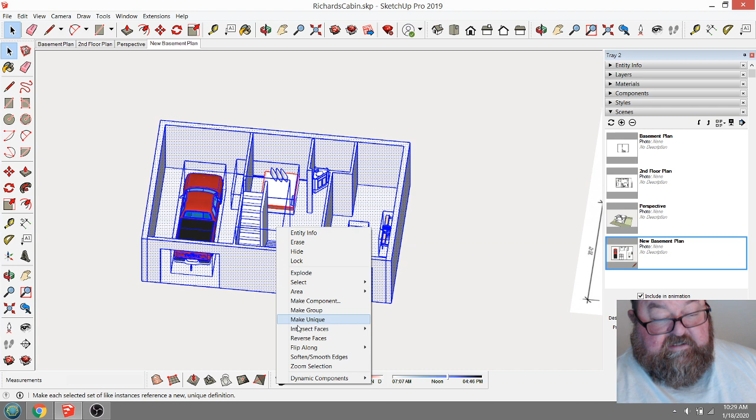We'll do like a section. Let's make a group out of this. And we'll double click on it and put us a... looks weird.

This is how we do our floor plans. And then we'll go back to that view. Oh, darn.

Make it the active cut. Then we turn off our section planes. And why did my style change? There we go. And that just shows you the cuts so you can look at all the doors, where the door and window locations are.

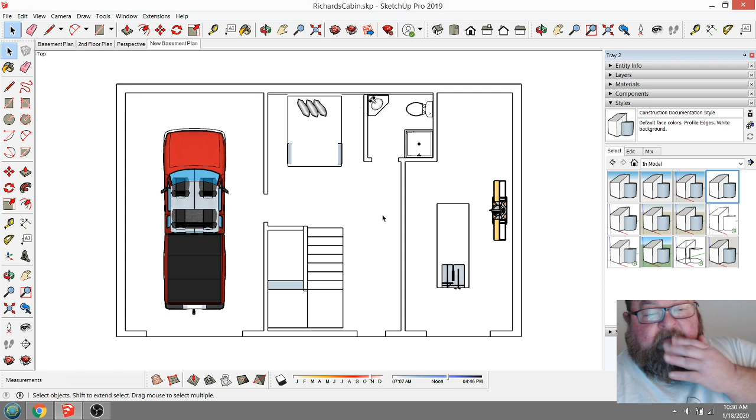Now, one thing you're going to run into, well, you have a door. You're going to have an egress door for this bedroom. The new codes are going to be requiring 2 egress out of a residential occupancy. So you're going to have this door right here so that you can come down the stairs. And this is cutting through that stair, that's why it looks like this.

This would show you underneath what would be underneath this stair. But you're going to have this door here for egress requirements, because you don't have an egress window in this bedroom. Every bedroom has to have an egress window unless you have a door leading directly outside. That's why you'd have to have this door right here.

So we're going to save that view, update, and this is kind of how we would print it on a sheet of paper. I would take it into a program called LayOut and put dimensions on it. And once we're happy with the way it looks, let's go back to our perspective.

Okay, so I think I'll cut it off here. How long have I been going? Not quite sure, but if there's no questions, I will cut it off here and we'll see what Richard says.

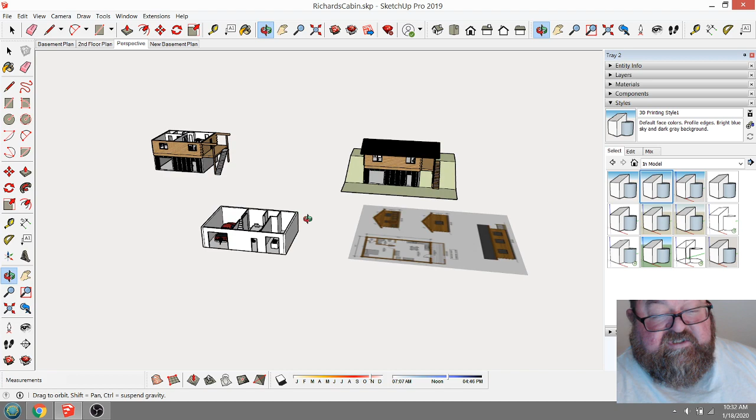And I want to thank Richard. Richard's been a good friend. I don't know how much he wants me to say about him, but he's a good guy, and I'm hoping he can make it to the States and he can build this project, and we can help him with it somehow, even if it's just with this kind of stuff, laying out, showing him adjacencies and the minimum space requirements for things like that. If I can help in any way, I'm happy to.